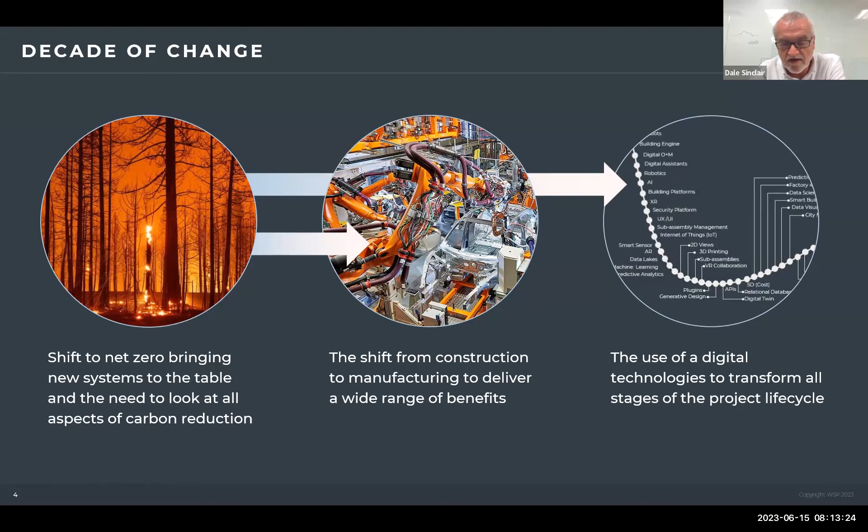I've got a couple of slides to contextualize the digital technology piece, but I really want to focus this talk on how we really move towards manufacturing and why that's such a different kind of proposition to designing for construction.

In terms of technology, my team are actively monitoring more than 100 technologies. We're actually looking at these every single day. I'd say this slide is probably a few months out of date, but the point is there's lots of technologies out there.

I think the other important thing about the scale paradigm is that the scale drawing sort of led to CAD, because we eventually gave in to drawing things in 2D at full size, but then we pushed out to the scale drawing. I'm still seeing that as a massive problem with our BIM strategies. We're modeling things in 3D, we're putting in more data, but we're still pushing out to the scale drawing, which to me is a shame, actually, because it starts to create a lot of waste in the process.

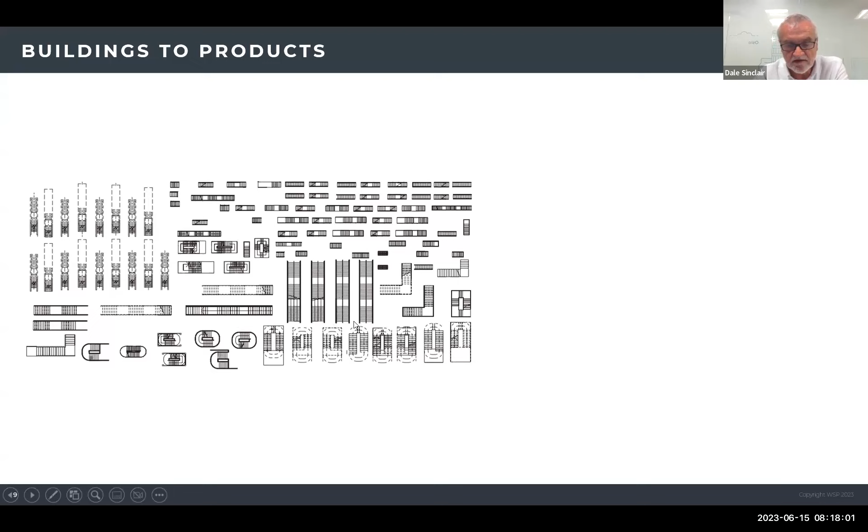Now, the other thing is that what I see in the way that we design buildings just now, it's a really inefficient process. I'm not going to go into the software tools, but I'm sure you're using the same tools as me. What I see is that even in creating simple things like staircases, we end up with lots of different options. Why are we not just creating a catalogue of staircases and using it?

That catalogue could come from me as an architect, or it could come from suppliers. So the big thing I'm going to be talking about today is the benefit of digital catalogues and how they transform how we design buildings, why we don't need to reinvent how to design a staircase every time, and how to make sure every single project smashes it. Every time I go down a staircase and see a vertical piece of handrailing, I'm like, yeah, didn't work there. It's incredible how people that design buildings every day can still design products within a building that are not actually proper.

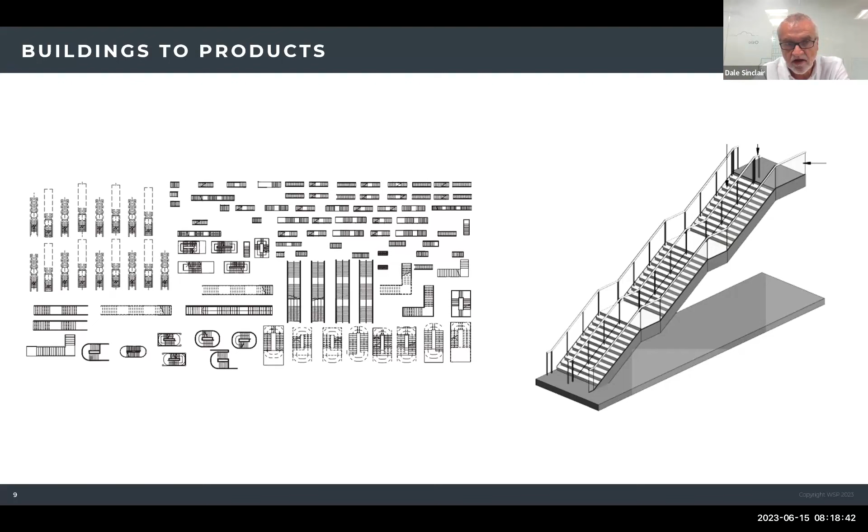What I see is the big opportunity for us as architects and as an industry is that construction has never quite nailed it in terms of getting the productivity improvements of the manufacturing sector. So for me, the big proposition here is how do we leverage the massive productivity coming out of manufacturing and bring that to the construction sector, which will drive down costs and allow us to deliver buildings faster and better.

Everything I see suggests that offsite manufacturing delivers every single metric around carbon, around health and safety. The only area that we're not really smashing it just now is cost. So I'm going to tackle that head on in this talk today.

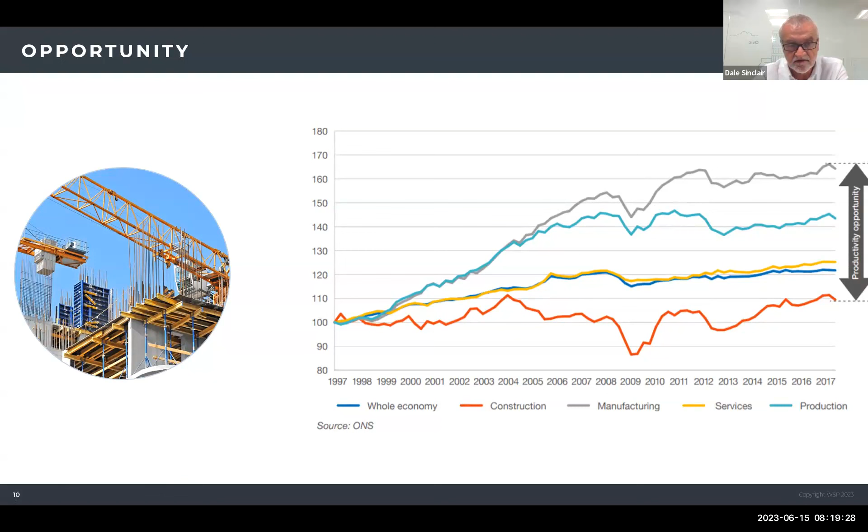But certainly the big thing for me is if you take 20% of the construction output, whether it's New Zealand or the UK, and push that into the factory, in the UK that would be 500,000 people that all of a sudden don't have to go to a construction site. I can place them anywhere in the UK.

So what we're seeing is that whole proposition drives new social value propositions, because I can place those 500,000 jobs anywhere in the UK. So it's not just about moving from construction to manufacturing, we can drive a lot of other benefits from that to the broader economy of our countries.

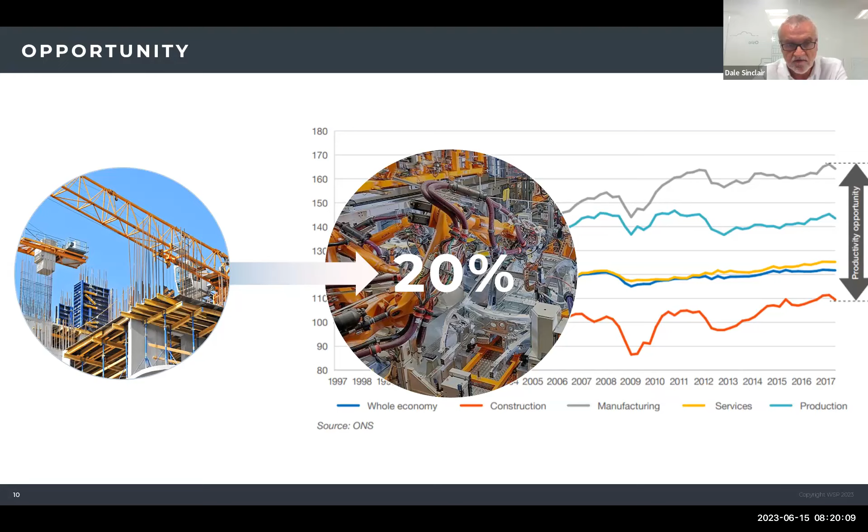Now in the UK we've had the construction playbook, which talks about platforms, and I think that discussion is really good, though difficult sometimes to unpack what it actually means for us as an industry. Simplistically, the way I see it is the way the car industry has used platform approaches: they basically standardize across the things you don't see, like the chassis of different cars. You might drive a Porsche and not realize it's got the same components as a Volkswagen. So lots of different commonality the customer's not aware of.

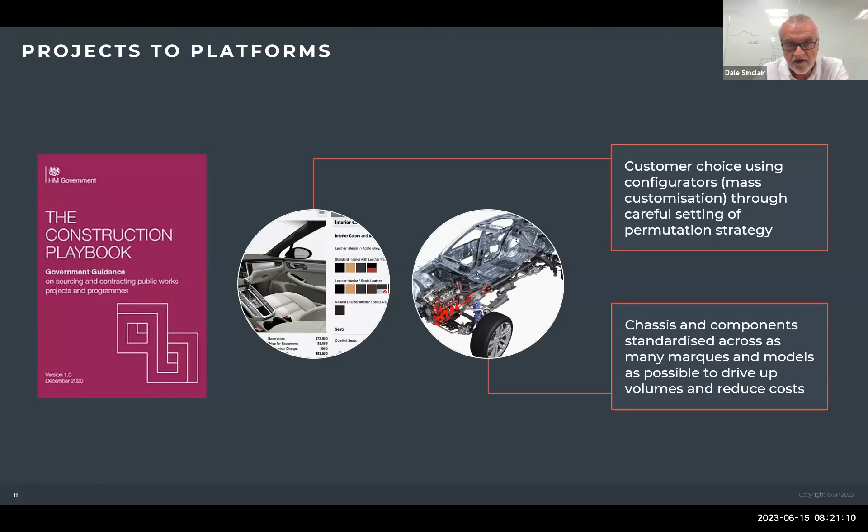But I think when people talk about platforms, they don't realize there's a flip side. We're also seeing a huge shift in industries towards customer experience and the customer being able to select things downstream. So a real shift towards standardization to drive down costs, but then actually giving that back to the customer, or the customer's customer, to allow them to co-create, in the way that we design buildings.

There are lots of reasons for that. Every site is different, the planning departments are different. But those are the challenges that we need to overcome.

People will tell me all the time, well, you can't do what you're doing because buildings are different, sites are different, planners are different, blah blah blah. Now we need to break that cycle. What we need to do is really start to think about why we can design buildings like products or platforms. Sometimes a product approach might be appropriate and sometimes a platform approach might be appropriate. But the key thing is we've got to move away from that project process. Now, a big thing I've realized, as I said, I wrote the first iteration of the DfMA overlay to the RIBA plan of work.

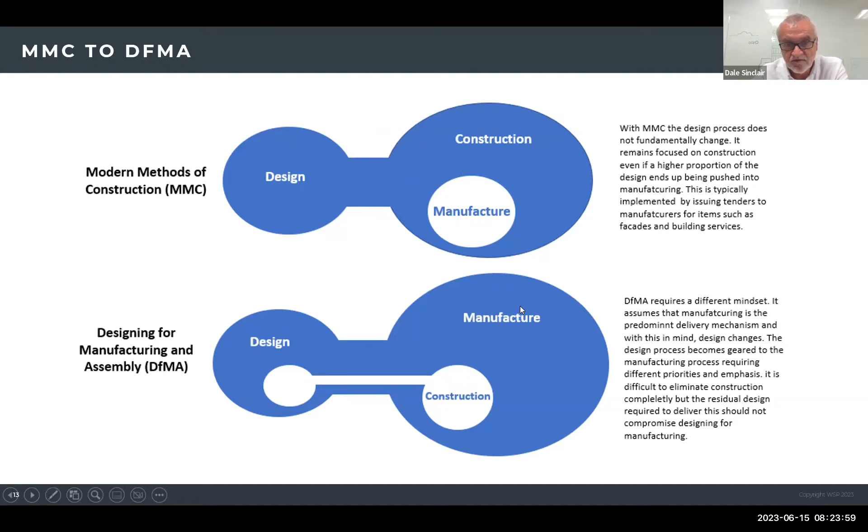So a big change for us in the future is if you continue to order small quantities into the factory in a single project that has not been standardized, you will get high costs. But the more you look at how you do things and have pattern books or digital catalogs, the more you can start to drive down costs. The crucial thing here is shifting away from that single project kind of mentality.

Now, what we see in the UK is definitely two rates of change just now. There's people that are optimizing what they've done their whole life, and there's a paradigm shift. It won't take you much to suss out that this is where I'm trying to go. We can certainly see that paradigm shift around the corner. Yes, I think a lot of what happens in the construction industry will still optimize what we do. But for me, the exciting side of this is trying to drive towards that paradigm shift.

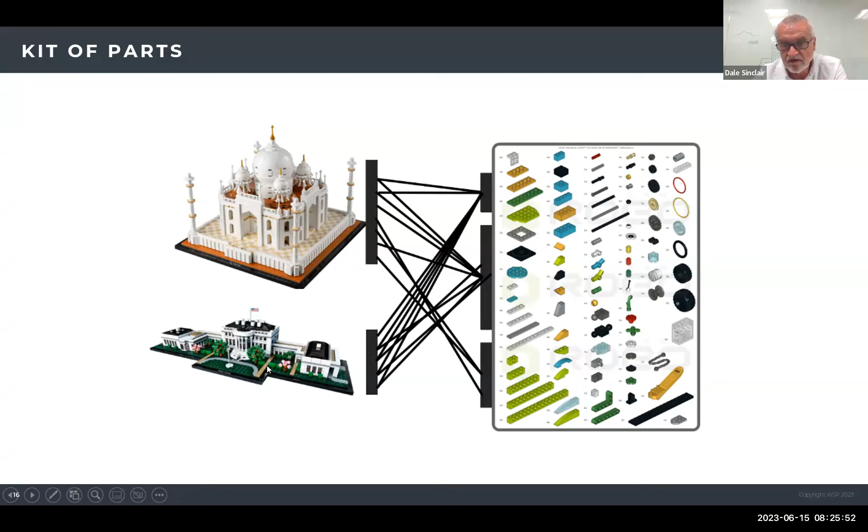And bizarrely, the analogies that we use - someone recently, we're working for a UK contractor just now, and they've decided to call it the Airfix kit. But the Lego analogy is fantastic. I don't have time today to talk about this, but there's a great story around how Lego changed their business model so that they could make kits from the Taj Mahal to the White House using more standard bricks. Really, that's what a kit of parts is all about.

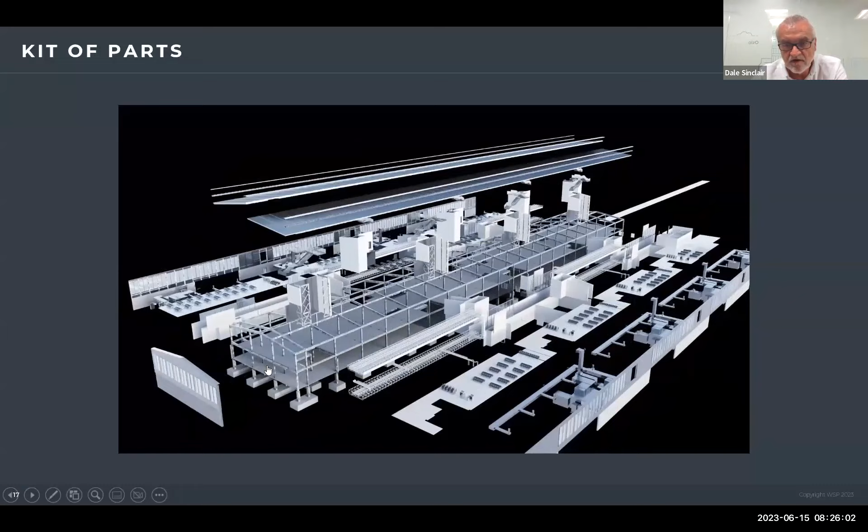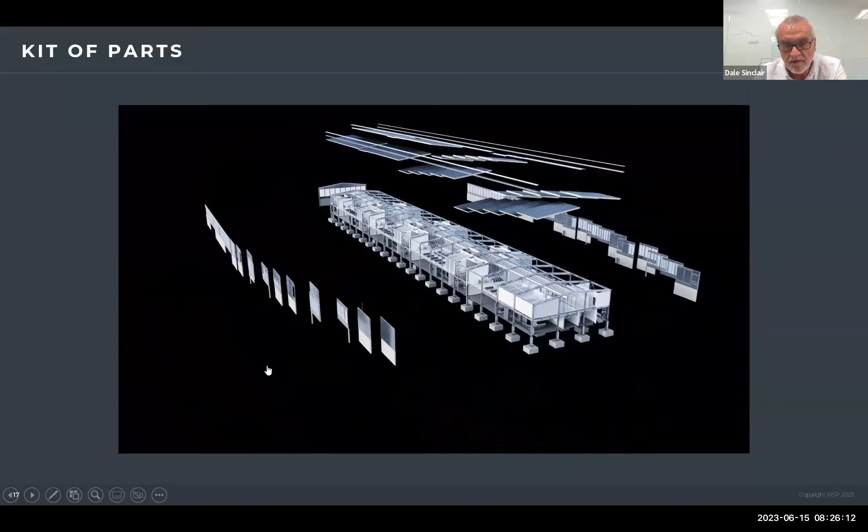This is a project that we've worked on with Mace. So this was a proof of concept we did for an aviation project. This was about how do we take a kit of parts, how do we standardize what we do so that when we're asked by Mace to do a pier for an airport, we're much faster and more agile in what we do.

And on the back of this project, we've just finished delivering our first project in Manchester Airport, where we're moving from having 5,000 small things coming to site to 60 big things coming to site. So all of a sudden, the sort of things that we're talking about now is, well, how do I do the whole craneage strategy?

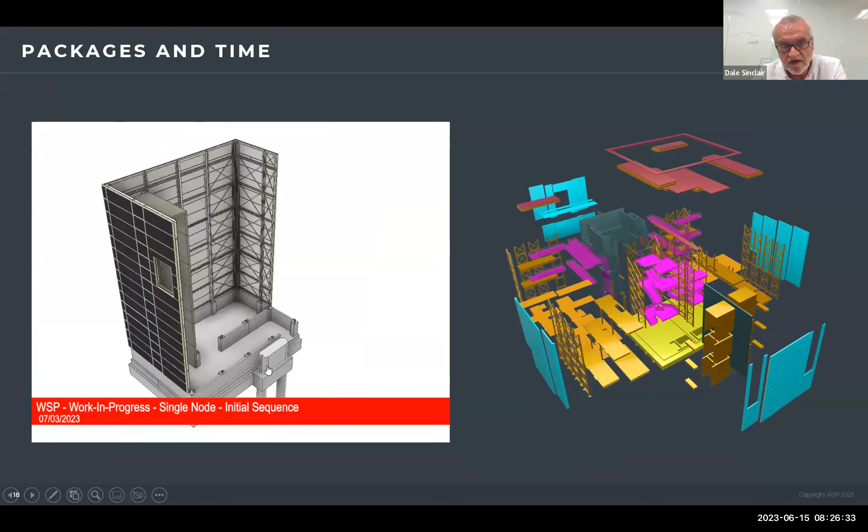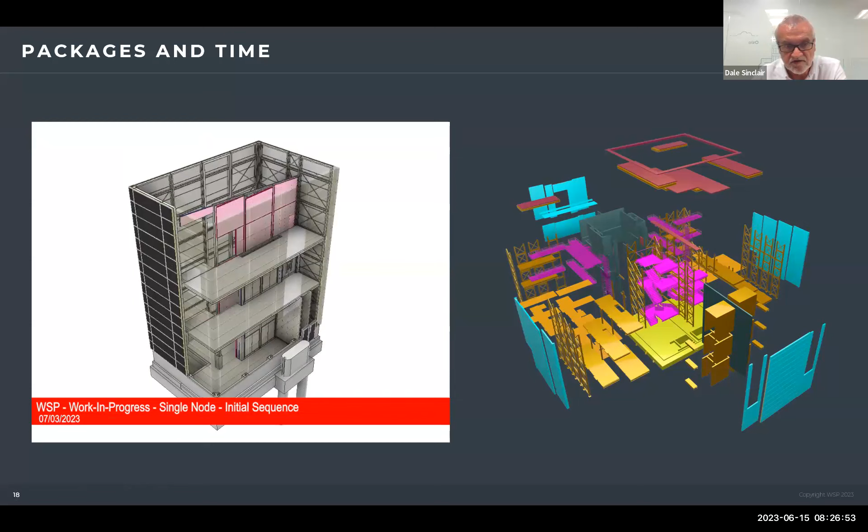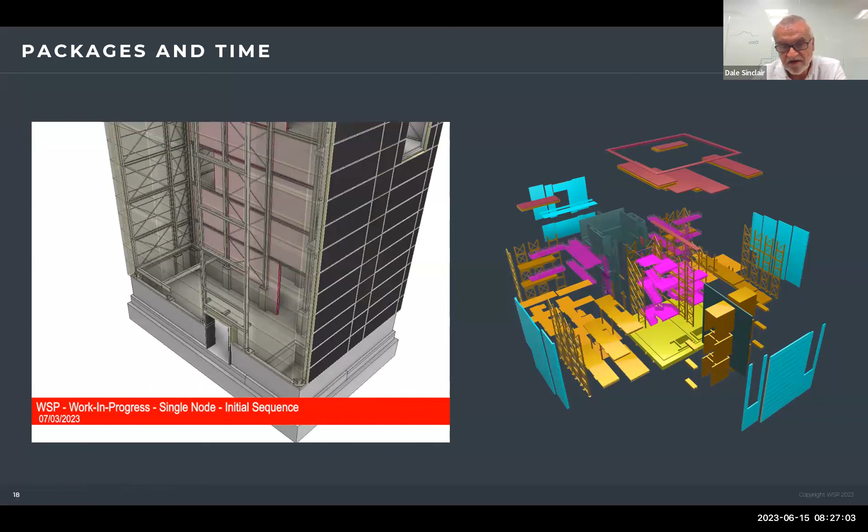Because now all of a sudden I've got finished cladding erected on steelwork, and I'm craning in 2-ton elements instead of 10-kilogram elements. So we're beginning to learn about how we bring all these different elements together. But this is what we see as the future. The Lego that we have in construction is very different to the Lego kits that our kids buy, because this stuff is really serious. It's big, it's heavy. How do we bring finished components together? We're beginning to figure that out on a lot of projects, and also figuring out how to bring construction management strategies and agile procurement processes to that whole methodology.

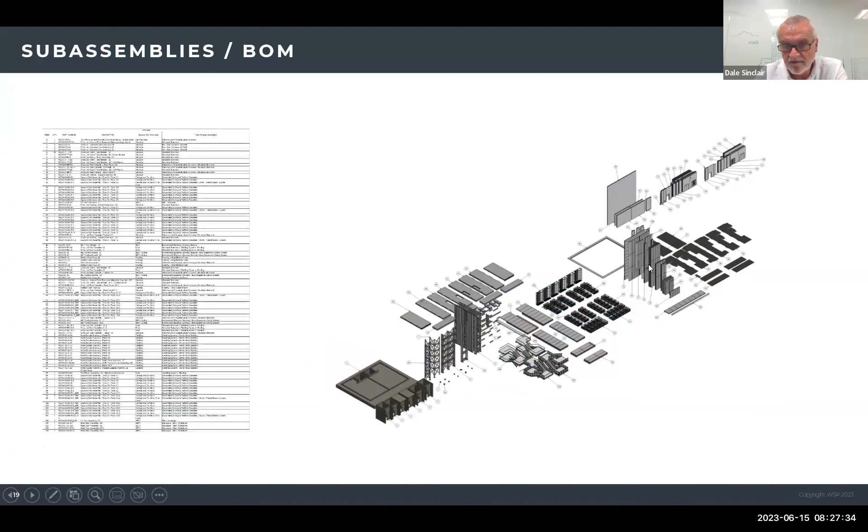We're also looking at how to shift the cost narrative. From our kit of parts, we know what every component is, so each component's got a lot of data attached to it, and I can drive bills of materials from this catalog that I begin to create. We're also looking at how data can give every single component its own unique identity, a part number, the same way if you've got a carburetor in a 1960 Ford, you can find that carburetor quite easily. So we're beginning to look at how we componentize things, but at the same time, if I'm doing a project, I want to know the unique identity of each truss so I can track it through manufacturing. Data is a huge piece of what we do.

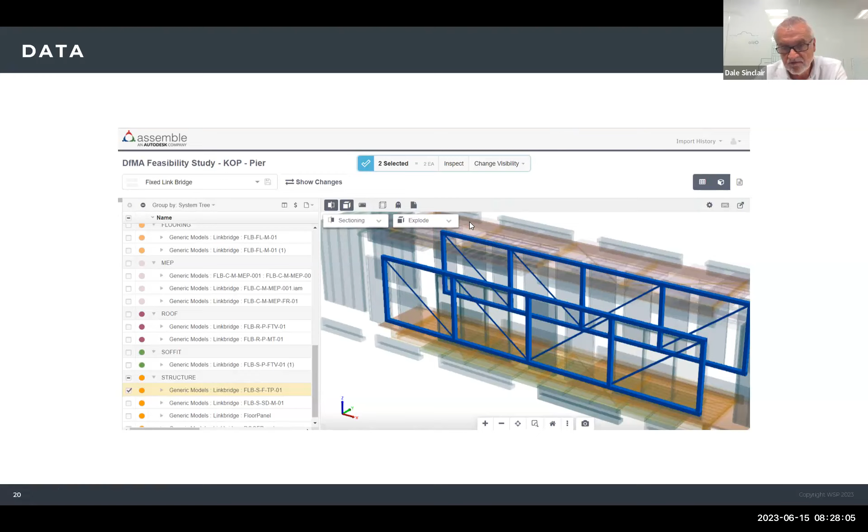Another part of what my team are doing is really starting to look at the downstream customer experience. So we're looking at how the car industry deals with this, and I find the Tesla versus BMW comparison really interesting, because Tesla actually have very few permutations. Elon Musk can do a red Tesla with a white interior, and he can smash out a hundred through his factory this week, and he's already sold most of these. So he's got a really efficient traditional manufacturing process. Hence the reason I was laughing my head off recently when he dropped his prices, because he's running a very traditional process. BMW, on the other hand, have a huge number of permutations.

Now, when I speak to people, they say, does this really feel any different in terms of configurations? A lot of people will say no. But I think that's the whole narrative we're starting to see: what's the difference here from a configuration perspective for a client versus the manufacturing difference. Because BMW, to make this work, have used IoT, cloud technologies, and a whole bunch of robotics to allow this level of permutations.

So we're seeing those conversations happening, certainly in the residential sector, and in a few projects we're looking at this at scale—delivering hundreds of thousands of homes in some locations, which needs a different strategy altogether. I think this is really pertinent to what you're doing in New Zealand, where you need to think about how many units you're building, how you might build those, what the quantities of the sub-assemblies are—it could be toilet pods—how do we buy these, is this a framework agreement, how do we get new procurement partners in. And all of this then drives a manufacturing strategy.

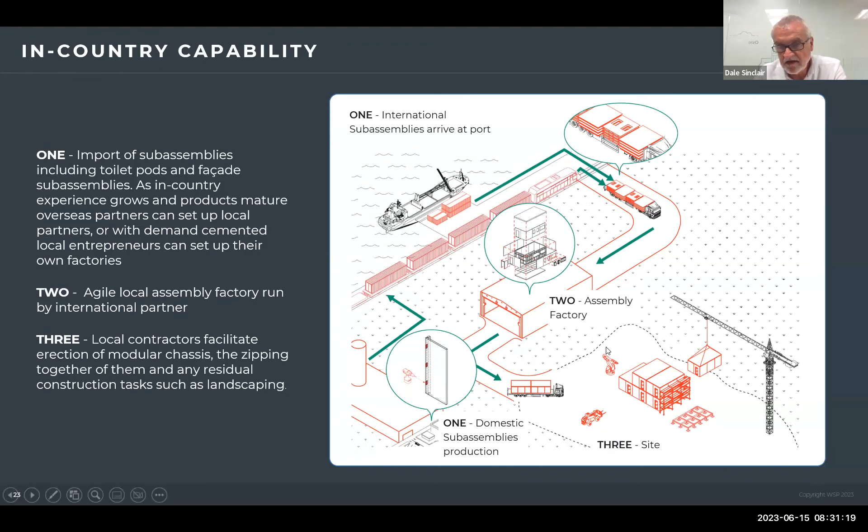We're also seeing the social value benefits, how you can increase productivity using robotics, but at the same time you might position certain aspects in areas where there's unemployment, because those construction workers can be placed anywhere in the country. So in a proper country-level manufacturing strategy, there's a combination of using robotics to drive down cost and increase productivity, and also using the value of where humans can actually drive certain propositions.

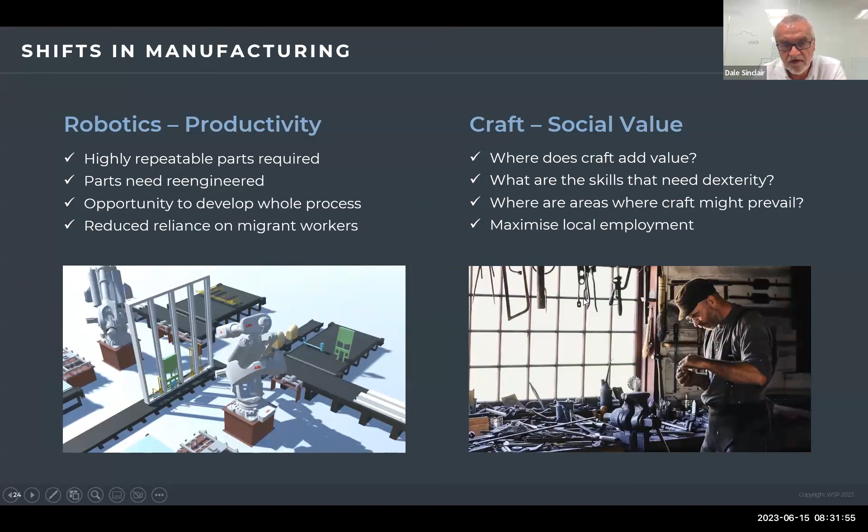The site process changes, so site becomes very different because I'm not constructing things now, but I've got things coming to site super fast, so I still maybe need to put things in the ground. This is back to the point I was making - Jony Ive doesn't have to deal with this when he's doing a new product, but we certainly need to.

Of all of these, I think where we've become really mature in the UK is some of the off-site buildings we've done recently. I've got some fantastic detailing - it's becoming so hard to tell the difference between a building that's made in the factory and one that's made through construction.

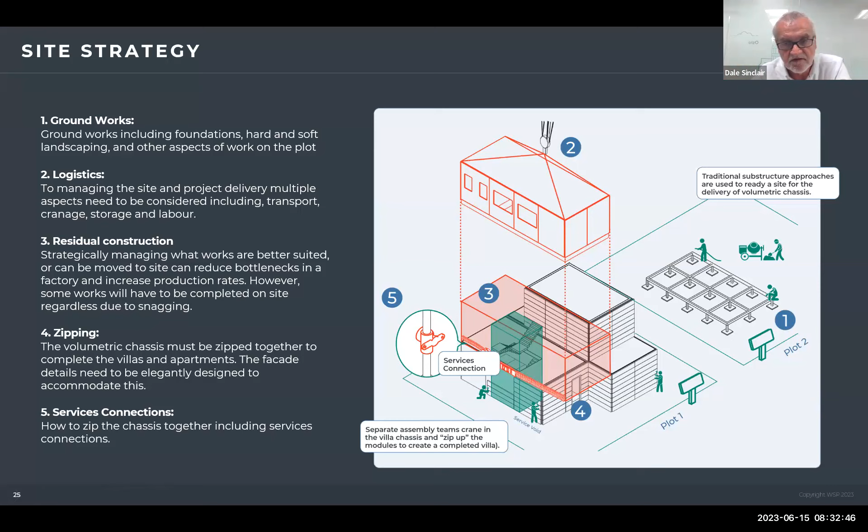But for me, the biggest challenge is around the services connections, because actually getting into the modules and how you fix things together is so much different to construction. So we're beginning to really understand the differences of how site changes in that offsite manufacturing model.

And we're even starting to look at - well, even today, Ilke Homes have shut down their manufacturing facility, and I think that's about the third major offsite manufacturing company in the UK. So we need to have a conversation.

I think this is how it impacts you in New Zealand - how do you change the whole investment model where offsite manufacturing has got huge investment costs. And I guess what we're saying to some clients is, well, maybe you begin to break down the whole operation and look at investment at different levels.

Maybe you even start to have conversations about the software, the sensors, where you can actually start to look at repeatable processes around digital twins or other things. Maybe you're speaking to the likes of ABB and looking at how robotics work across a program level. Maybe you've got some universities in Wellington or wherever where you're actually starting to train people to set up and run agile kind of flying factories and so on and so forth.

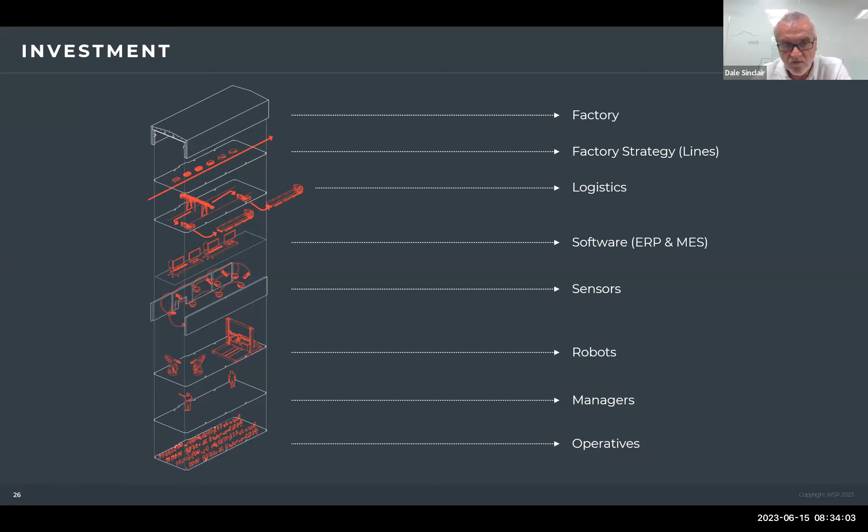So I guess what we're advocating is that you look at offsite manufacturing as a whole, but also look at the parts and how you might mobilize those differently. We're becoming familiar with the whole chassis - there's a recent study we did that shows something like 75 countries in the world now have this experience.

So my key insight to you here is don't bring in people from aerospace, don't bring in people from automotive. Offsite manufacturing at this kind of scale is different, and there are a lot of countries that now have the skill sets to advise on what to do to set this up.

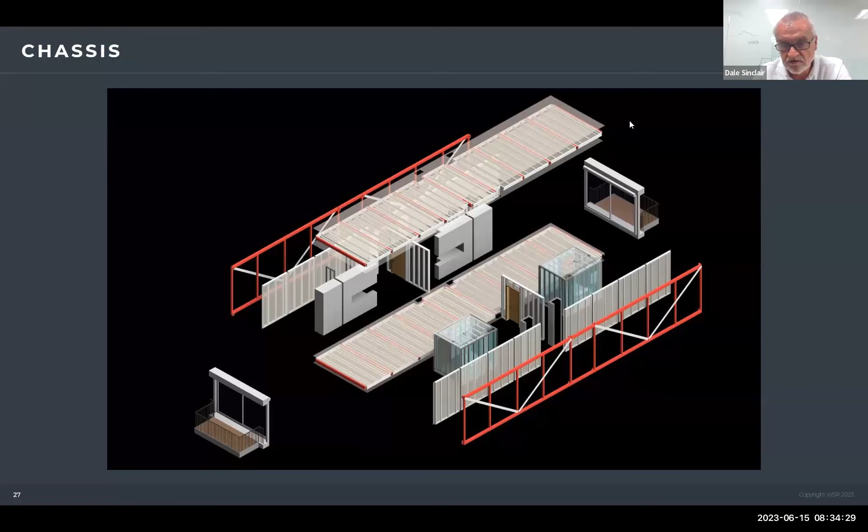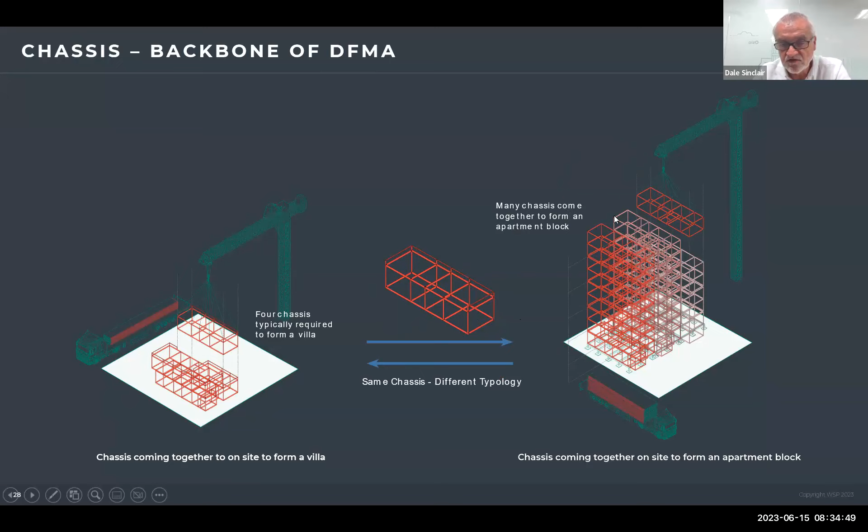And picking up this point - if I create a structural chassis, I can push that to a single building, maybe a villa, or maybe a single apartment block. Now the manufacturing process for this is exactly the same, but yes, the site process is slightly different, and maybe I need an in-situ concrete core here. But the key element here is the same.

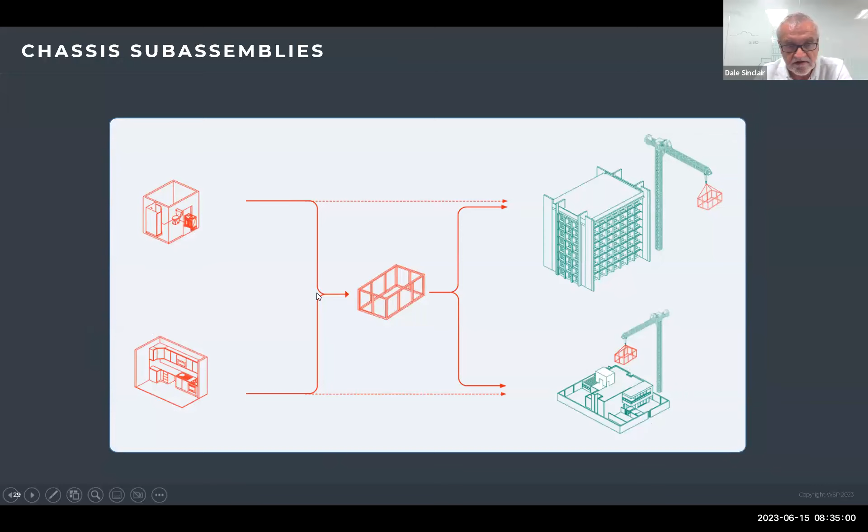And then we start to look at what goes into that. Well, yes, maybe we've got the toilets and the kitchens that go into the chassis that go into these different building types. And then even within those toilets, we say, hold on a minute, let's try not to have 1,000 versions of a toilet - let's standardize how that gets made.

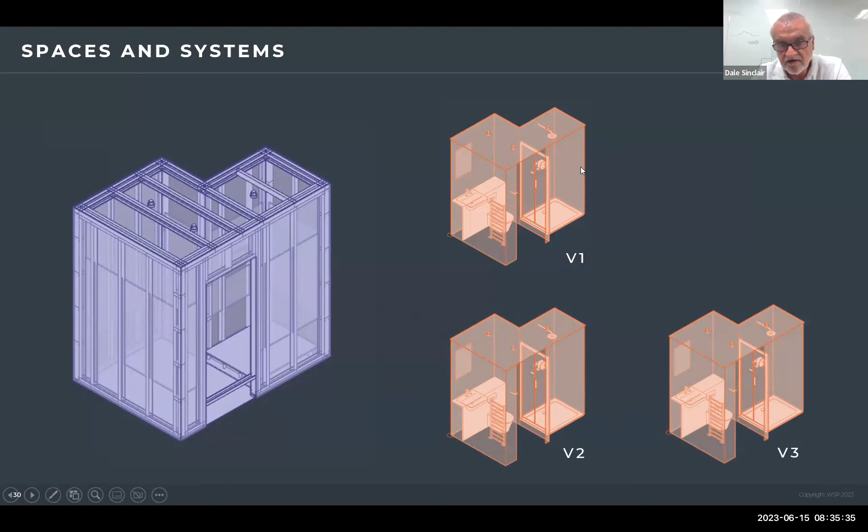And then let's look at how the customer might create different interiors to that. So I guess I'll just keep reinforcing this point that designing for offsite manufacturing is very different - it's about trying to maximize what is repetitive, but at the same time allowing design change. So think about that, as many product designers allow as much change as possible.

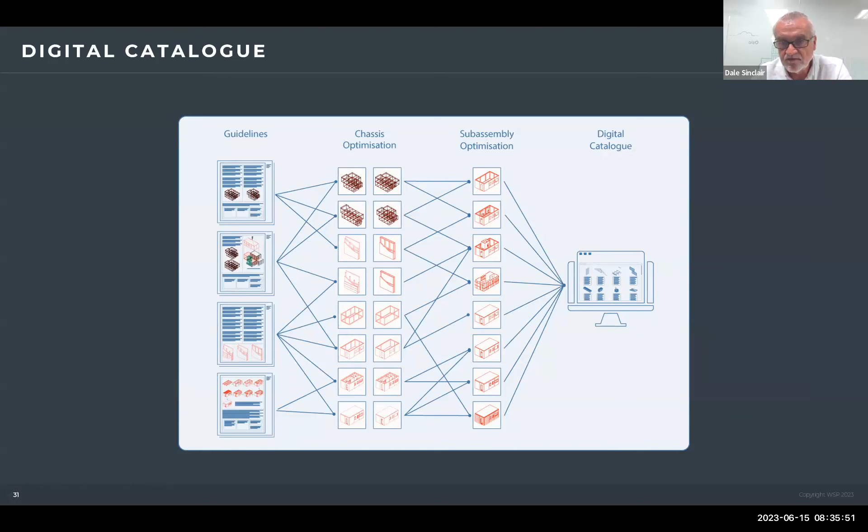And similarly, a lot of clients have got design guidelines, and we're saying, well, you've got to make a shift around this optimization into having digital catalogs. So shifting away from guidelines to reusable digital content. We're seeing a shift even to what construction information is.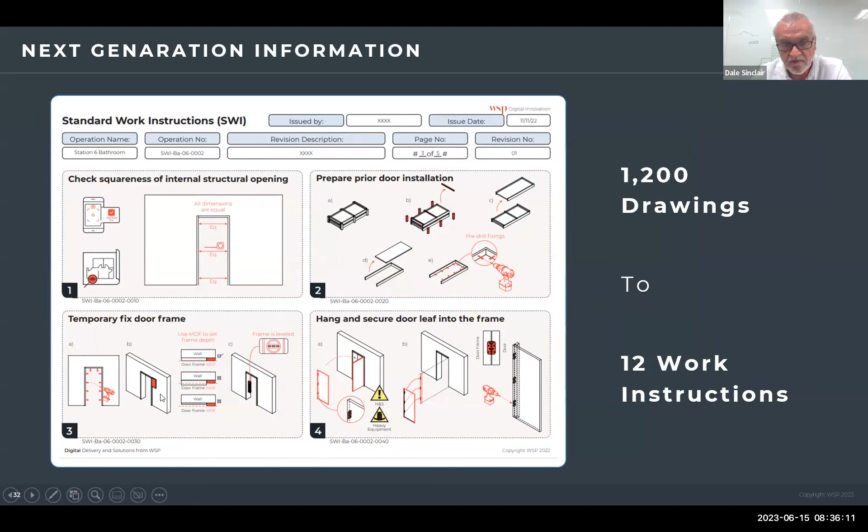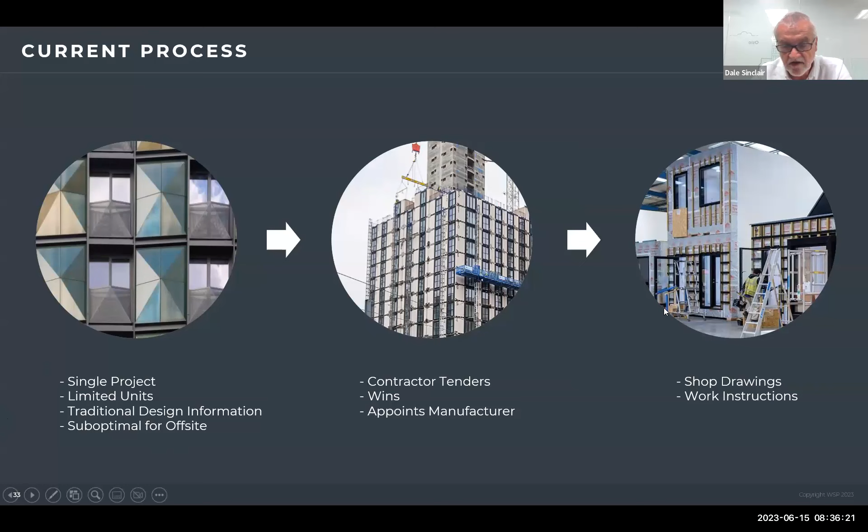So we've got one manufacturer we're working with that's actually thrown 1,200 drawings into the bin and now has 12 IKEA type drawings. So really simple elements that help to unlock unskilled labor in the factory and on site. The whole construction process, where you design a single project and go through a competitive tender, completely changes when you start to look at platform or product design.

That's an area where we see some of the biggest challenges alongside the cultural changes, but there are huge opportunities if clients come together and say, well, hold on, you've got 1,200 toilet pods, I've got 1,200 toilet pods. Why don't we get a framework that works together, so we can drive down costs through our combined scale?

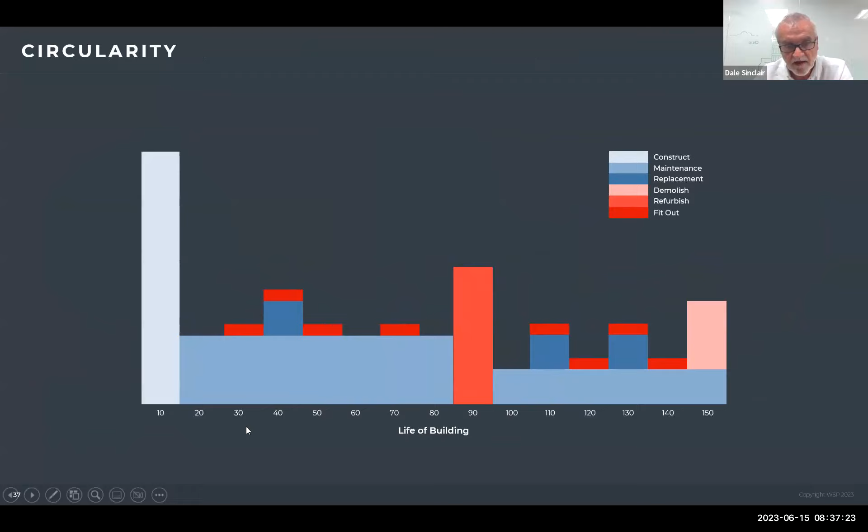Now, a final couple of points before I hand back to Jane. Longer term, we design buildings, we demolish them, design buildings and demolish them. The circular economy is going to come into play at some point, and certainly for bigger buildings, not necessarily residential, we're going to see less demolition. That's a trend we're seeing in London. It's becoming harder and harder to demolish a building. So we need to start looking at how we refurbish buildings, and maybe the design life of buildings becomes much longer. And of course, that means we need to think about how we replace things.

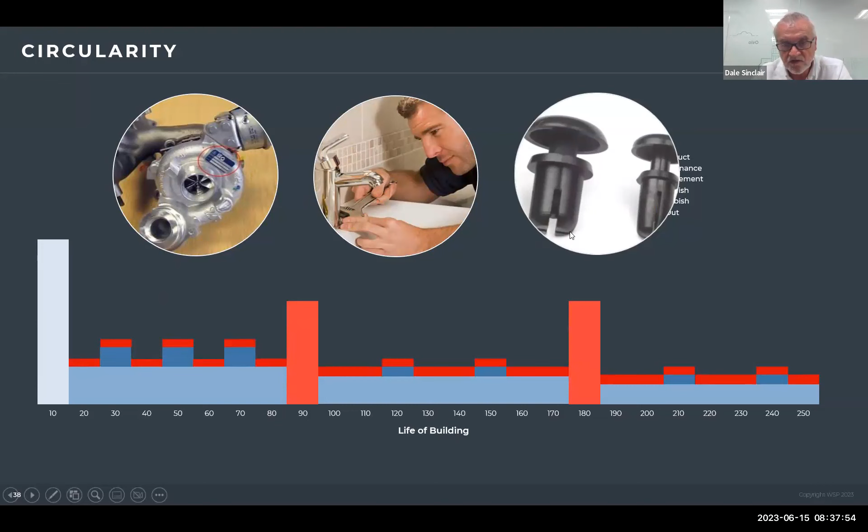I find it amazing that in my kitchen at home, I've got no idea what my tap is. If I have to replace it, I've got to crawl under the sink, get all the stuff out of the cupboard underneath it, a very convoluted process. So why can't I just unplug that tap and push in a new one? There's lots to be done to change how we design buildings for the future, and that's all part of this change.

So, a final couple of comments: I encourage you all to look at other business models. I like the car industry one, how there's a configurator process, but that configuration ends with a code and a configuration being saved. It's not automated into fabrication - that's a separate process that happens. So there's a complete detachment between the way the factory works and the way the sale process works.

If you look at IKEA, it's interesting. You can go online and design your own kitchen using their web tools, or if you're not familiar with digital tools, someone will help you. You purchase it, and a few days later all these boxes turn up at your house. Some companies are piggybacking that to put the boxes together for you in your own home. But the interesting thing from a manufacturing point of view is nothing changes - they keep churning out thousands and thousands of these boxes. So the whole configuration process has got no correlation with the manufacturing process.

And if I go to the other end, there's an amazing shelving system, Tylko, where you can do a parametric shelving design. You can change the heights, the widths, the density, the material. It instantly gives you a price, then pushes that into fabrication. Same thing - it comes in a box and you put it all together.